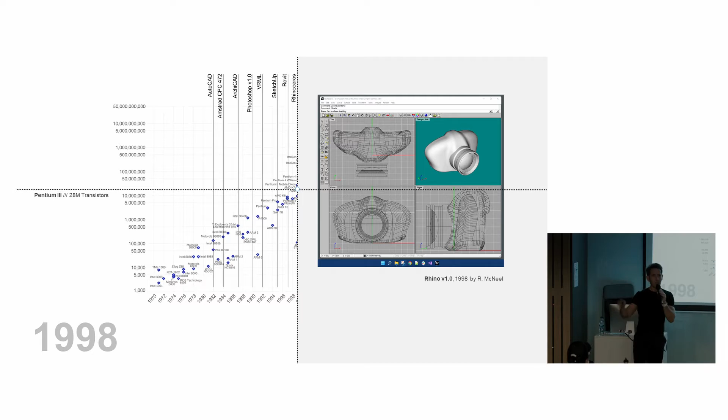We continued the progression. In 1990 we have the first version of Photoshop. Progressively, we're moving into Pentium 3, and Rhino version 1 was released. So we're working with NURBS, curves, smooth geometry, and every project was very blobby, very smooth. At the beginning, when a tool is released, we try to maximize the power of the tool. Then continuing to 2007, Grasshopper for Rhino was released by David Rutten and Robert McNeel.

And you can see here the power of the computers now is 250 million transistors. It's actually getting more powerful. So we're able to move complex geometries to code real time and display results in that fashion.

2010, as well, 3D printing starts. In the architectural way, or in pavilions like this one by ICD, start to take shape, taking advantage of the computational power and the technology that was released.

So getting closer to today, we're looking at 2020 when the pre-trained model GPT was released by OpenAI, and was kind of revolutionary, but was not probably getting the attention that it got recently with GPT 3.5 or GPT-4. So GPT-4 in 2023 by OpenAI was a game changer, and we started seeing a big transformation.

And of course, taking advantage of the new processors like Apple M3 with 50 billion transistors compared to just 4 years ago. So that's the exponential movement that we're having right now with technology and where we are.

So it's been not much time between when Autodesk was released, AutoCAD 1.0, and now ChatGPT. And for me, these 2 icons basically express the shift of paradigm we are in. We use computational tools, we call them tools, as something that aids human work. Now we're looking at computational power to be intelligent, to act as a new intelligence. So a shifting paradigm from tools that perform specific tasks to something that could learn and adapt over time.

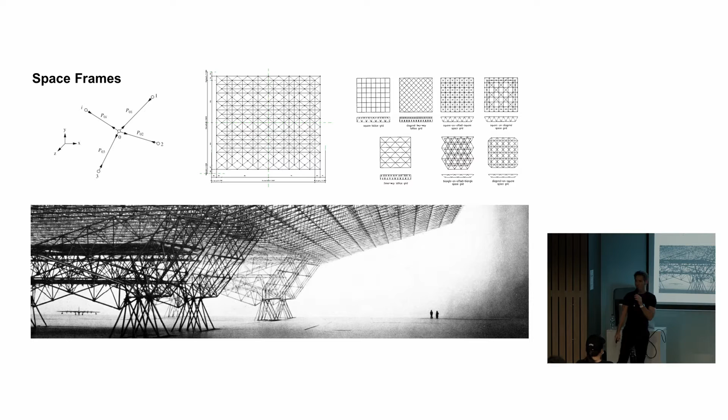You can place it exactly where you want. So you have deliberate control of the mass and the placement of your elements that define the space. So I focused over the last 7 years of my research on space frame structures. Space frame structures are defined by bars and nodes.

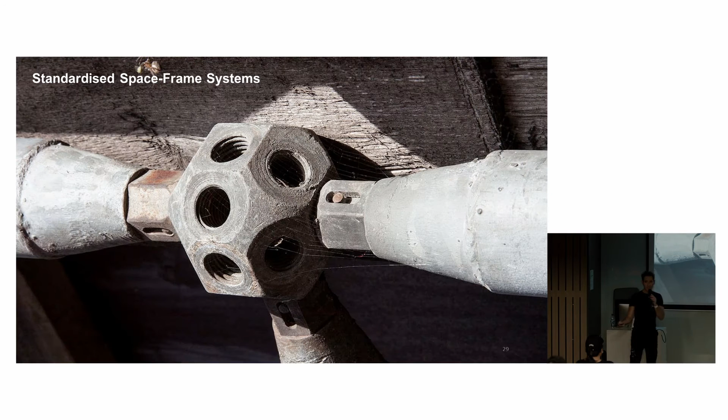Here you see standard nodes, and the standard nodes look like this, typically as a regular piece. So what I wanted to do is to challenge the way that those connections could be done, taking advantage of the current technologies by then, which is 3D printing and computational design.

Now neural networks have a different relevance, but the aesthetics and the topology of it was what inspired me to develop this system where we have 3D printed nodes, and also standard profiles. And the combination of both creates a free-form system capable of transferring the forces to the center of each of the nodes. This was developed as a system.

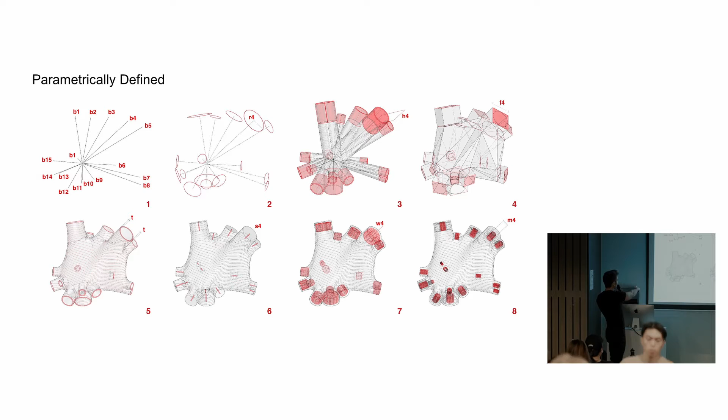So we have a parametric design model that can be reconfigured in real time depending on the geometry that we want to make. This is the process from vectors to cylinders to a convex hull in a faceted way, thickness, adding the connections, and all the parts are automated by the script.

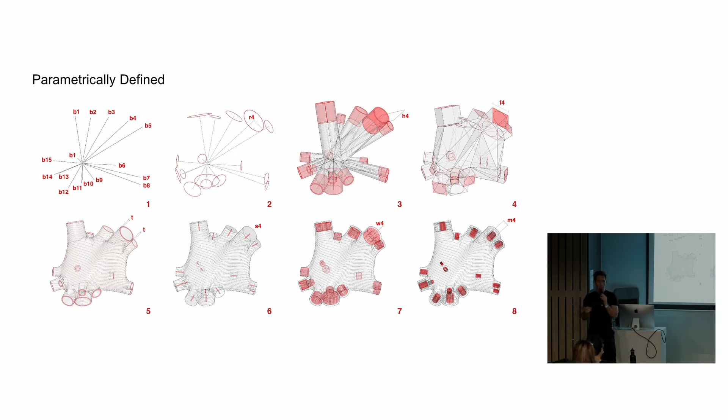So we design coding, right? Coding gets extremely relevant these days to address those complex challenges that we are facing. And then we have 3D printing. So the combination of coding with 3D printing allows us to produce these nodes.

More than 80% of the piece is actually air. So we are saving materials. We are placing the material where it's needed.

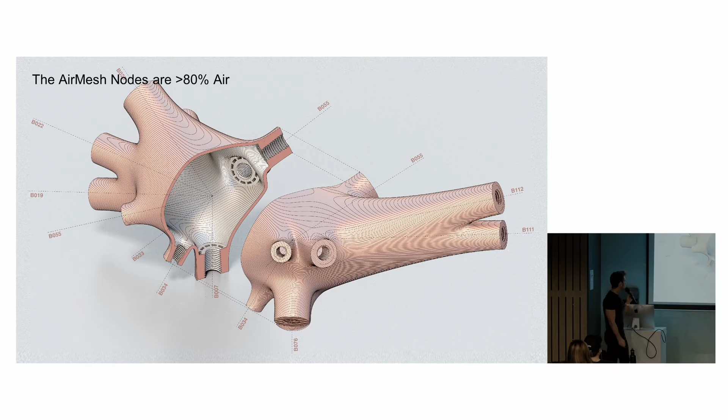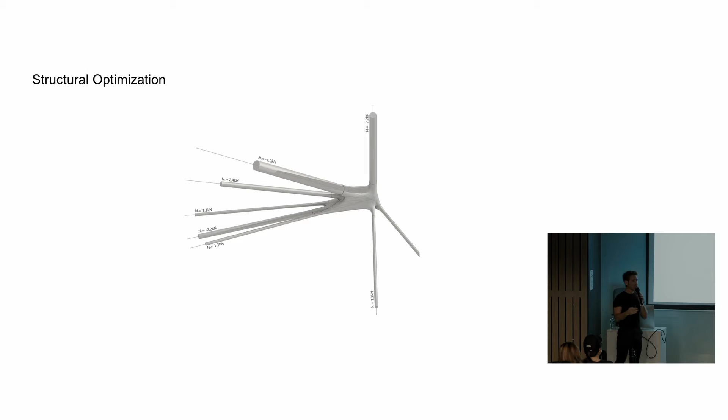So by doing that, we can print in stainless steel, using existing materials but in a completely different and more efficient way. So this is the generation process. We basically analyze the forces of the structure, then assign a diameter for each bar based on the force, tension, compression, and create the components for all of them. We have a dynamic model, a living structure that reacts to different efforts. This model is calculated in real-time, so we can make changes to every part of the design instantly.

So we tested the system at small scale, on a table. We did this table, and it's actually very thin. The bars are only 6 millimeters in diameter, and the nodes are 3D printed in metal.

We also tested at a larger scale, in this case using nodes in metal and nylon and aluminum bars. We also did light installations like this one in 2017 for Marina Bay, where the lights were concealed inside the bars and became a very inviting, magical material that people could touch and react to the presence of people.

We tested the system in different contexts and materials, even in the National Design Center, where that structure became a chandelier. Also with bamboo, we developed the system to absorb its imperfections and create regular structures like this one, which was at Duxton Hill for 3 months.

Then we moved to Gardens by the Bay for our idea. The idea was to build something more permanent, like for 3 years, a pavilion that could take the load of people and be code compliant—the first in the world with stainless steel that was code compliant.

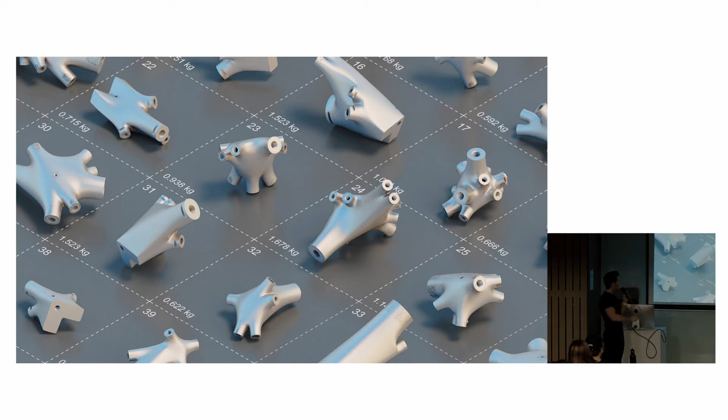So we developed all the connectors that you can see here. We control every single part of these connectors—we even print the threads for the bolts to go in. That's the depth we get when we use computational design to fabricate these components.

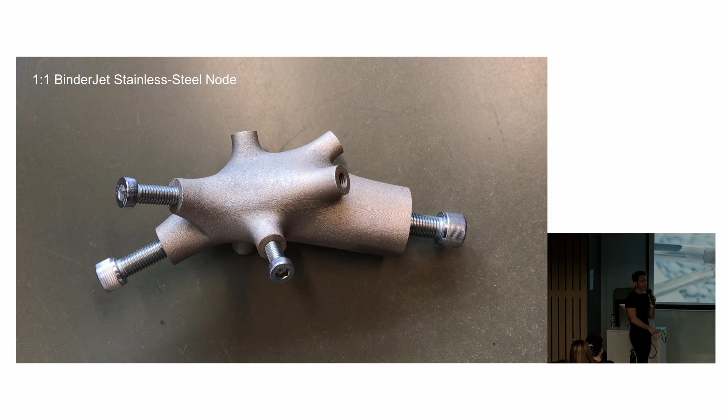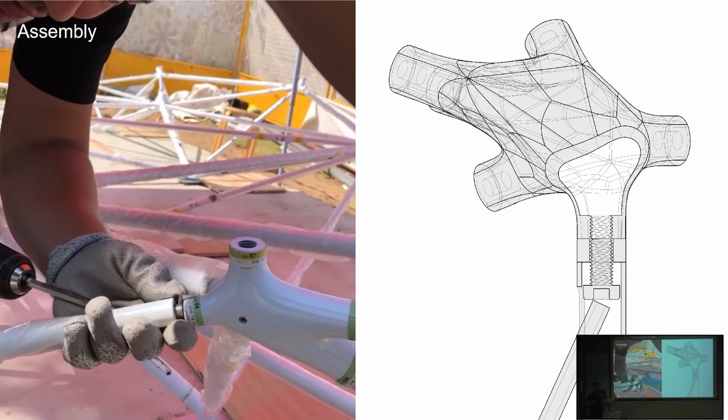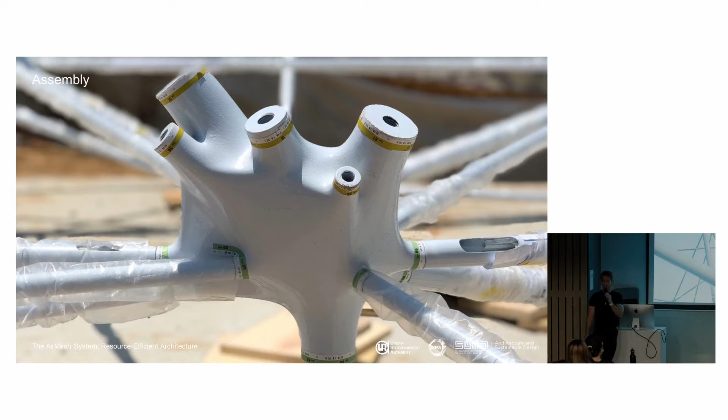Then we label them. We have a model with structured data, so we can label and connect them like IKEA furniture. We just go to the site, find the bar, find the node, and in 5 seconds we have a secured connection. We were able to build this structure in less than a day, with just the 5 of us researchers putting it together.

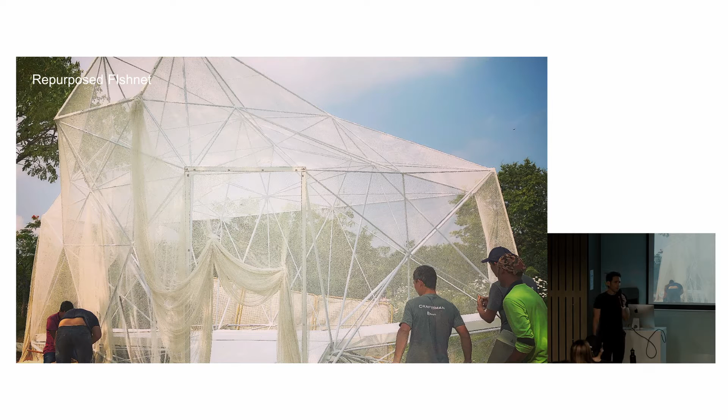And this is actually code compliant—a proper stainless steel structure that can take the load of people, furniture, living loads. We tested it by putting 3.5 tons of weight on it. With a 3D scanner, we could see the variation and movement of the structure, which was just a few millimeters. So again, talking about precision, right?

When we look at this space right now, the position of every single point, the structures, the loads that travel through the structure have all been deliberately calculated. So we feel really in control of each and every part of this pavilion, of this design, that we were fortunate enough to get here, Kelly, in the picture.

The President's Design Award, right during COVID times. We were able to be there at least—it was tough times, but we made it, and we got the appreciation from the community of designers.

But then, about 2 years ago, I would call it the impact. Something happened, and it was almost overnight for me. I had been working with AI in different projects—I was teaching a robotic arm to make a tall structure, trying to address loads with AI to create new aesthetics—but this was something new. I was like, what's this about? For me, it's like, okay, now I know human intelligence, but now we are dealing with some new kind of intelligence.

So the core of this presentation is divided into 3 parts. The first one is working with a new, fresh uncertainty. The second one is taking control. The last part is more about the expansive waves we are in.

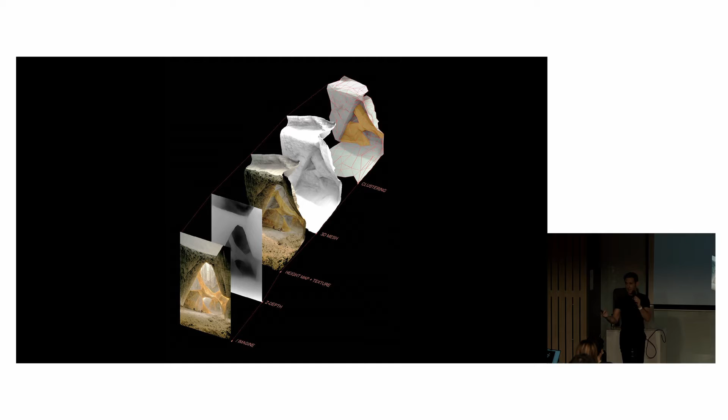This is basically created with this workflow: we have the image, we can create a Z map with AI. With the Z map, we can displace the image so we have a certain volume, and then we can do some segmentation, so we can cluster and assign different parts to the mesh. With that, we can actually turn an image into a real landscape in just a few seconds.

Talking now, it's as if it was really, really long ago, but it's only 1.5 years ago. So then I was also trying to fuel my interest in landscape integration, trying Midjourney, and the possibilities of can we weave architecture with a mountain, with something more belonging to nature. I was creating this series in September 2023.

Immediately, the reaction from my designer inside is to draw it. I put this slide because for me it's a statement: we're not fully outsourcing our life to AI. This is not the way, and I think it's not going to be the way, at least for the next few years. We still have a good 5 to 10 years in which we are going to be working hand in hand with AI.

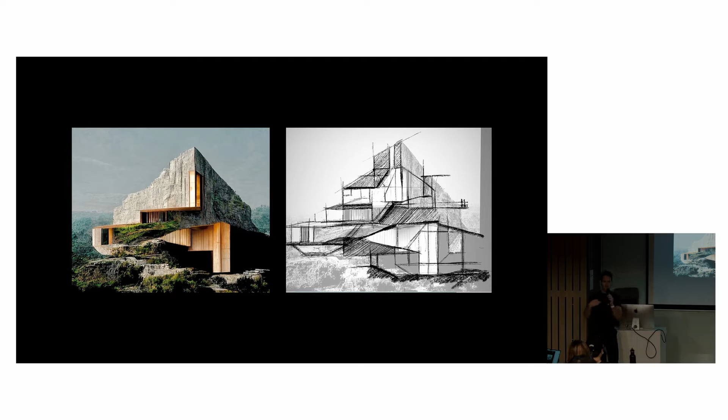So we need to establish that conversation where we are prompting, then we draw and sketch, we rationalize the geometry, we take it back to a 3D model, then we go back to AI. It's always like a conversation, and it's two-sided. We need to live with that.

The word consistency is always there in AI, because when you prompt, you get very different things. So the difficult thing is to get similar things throughout, so you can create a consistent design. Here the exploration was to try to create indoor spaces that were consistent through different locations of that mountain.

So you can create your own references, and the quality was very fine. The depth of field, the focus was fantastic. So I was testing, right? I mean, can we represent as well...

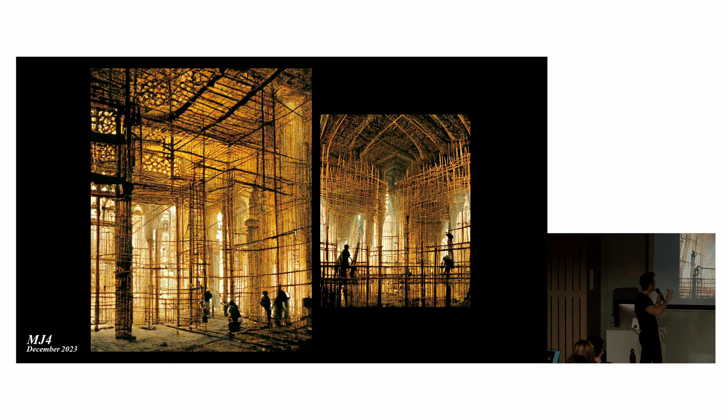...the construction of these bamboo structures, not just the bamboo itself, but the process by which these structures could have been made. So it's not representing the final object, but the in-between stage. This is an exploration of those spaces using bamboo and the construction of these structures.

Here, exploration of patterns, trying to apply them. I was working on a lattice design for Louis Vuitton, and trying to use Midjourney. I was trying to use Midjourney every single time I had a project or a question, so I could challenge the potential of the model.

So this is the pattern applied into a wall, and the idea was to blend it, not just adding, but maybe carving, to integrate the pattern into existing constructions.

Also taking the idea of the patterns to a space, explorations on that, trying to see if we can create images from image prompts, and then we can try to inform the space creation. And also at the smaller scale, looking at the fine detail of textures, weaving, and complex articulation of spaces.

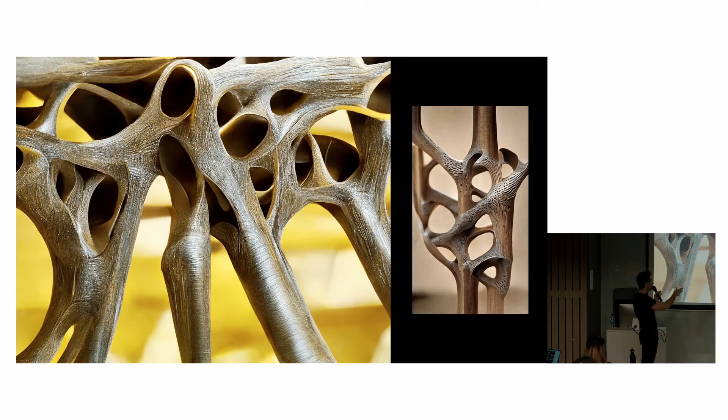Here, we're looking at the pavilion that I showed you a while ago. This is Midjourney developing it further. Maybe this is not fully buildable, but it's creating a certain direction that we could use to develop a future version of it, integrating steel and the aesthetics of bamboo. Midjourney works really well for that, blending very well different concepts and weaving them very smoothly. The prompt was working with metal, bamboo, and optimized structures, and you can see the hybrid materiality that you can get.

Testing intricate ornaments, like this part here with the Alhambra, seeing the grain, the resolution that we could get.

And then we move to the next level. This Midjourney V5 is coming closer to our days, so this is March 2023. Here we're looking at a series of images that are very realistic. We're looking at these kinds of cabins for a hotel project I was working on in Mexico, and the context is exactly the context we are actually working in. Describe the place, and the context was appearing, the slopes.

This is working with another concept that we have with the water tanks as a swimming pool, like in the landscape. So exploring this, a bit more daring ideas.

Working with style, here I was exploring concept designs for auditoriums inspired by the work of Enric Miralles. So the style is actually carried very well when it comes to prompting interior spaces.

I was also testing the design of furniture with 3D printing. Here, the focus was not just on the furniture itself, but on the user or also the designer. The idea was to represent the people behind it, or the people using it, which typically we don't have the chance to do. AI starts to blend the color of the dress and the material that is used.

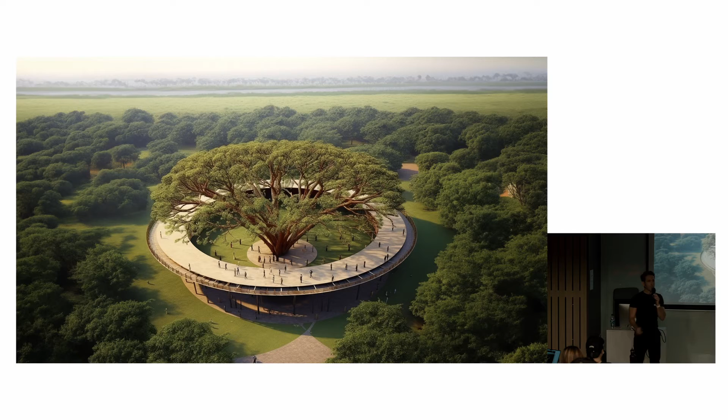Integrating landscape and the concept of parks that could be more three-dimensional and woven with the city. Or ideas like, how about we build around nature we don't touch? It's a concept you can try to consolidate into images thanks to AI.

This series was actually using some techniques of outpainting. Now with outpainting we can grow from an image outwards and create what happens around it. So from one image, maybe one cell, we create the context of what happens around the cell. I was creating these landscapes that had this stepped geometry, and they could be quite speculative as topographies.

And then also ideas like street sleeping. With Midjourney you've seen a lot of creations trying to take it to something that is not real, too far from what we want. But I try to find a sweet spot that could be provocative, like, how about we try to use a kind of bed in this kind of location? It provokes something. It's not that it's going to happen like this, but it tries to test ideas. Midjourney was working really well for that.

This is Midjourney 6, the latest version, the one that we have. Now we're looking at a very high grade of definition. We have control with the prompts, with the words. It can almost capture every single thing we say, and it will be there in the image. Now it's super sensitive, so we can almost make everything, but we need a lot of iterations to get there.

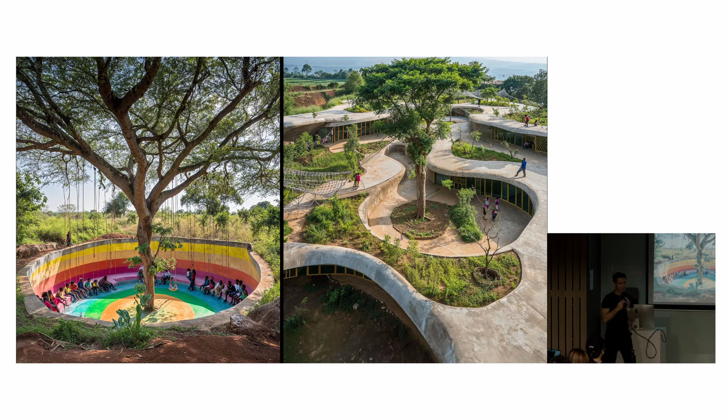And this is a concept for a school. That's the project I'm working on right now, trying to make partly happen, but some people say, well, you have these images, right? You don't have a project, you have just images. I think the mindset I have when I make this is I'm creating a project in my mind, maybe sightless. I have some conditions - if I'm asked to implement this idea into a place, I have the resources. I have the training in architecture, in design, so I know how to convert this into documents that can be used to be built. That's why with AI, at this point, you cannot just prompt and just make the building or make the space. You still need your own skills to be able to transfer this into our world.

Into the way that industry works. So images are very powerful because you can actually start rationalizing the geometry, drawing it nicely, create 3D models, and then just try to get there. So it feels like it's a different direction we can follow now. Typically, we work with diagrams with a very abstract approach at the beginning, and then we build up. This is more top-down - we create kind of the end we want to get there, and then we try to rationalize the geometry and build it from below to get there. It's a different approach.

So these also are videos created with AI - not just the sequence of images, but also the atmosphere, the way that the space could be used. And it really touched people, landed into people's heart. So I'm creating this series about how we can integrate nature into spaces that are educational, working with very little resources. In the end, it's just color, it's just paint, but it makes a huge difference when it comes to the design of those spaces.

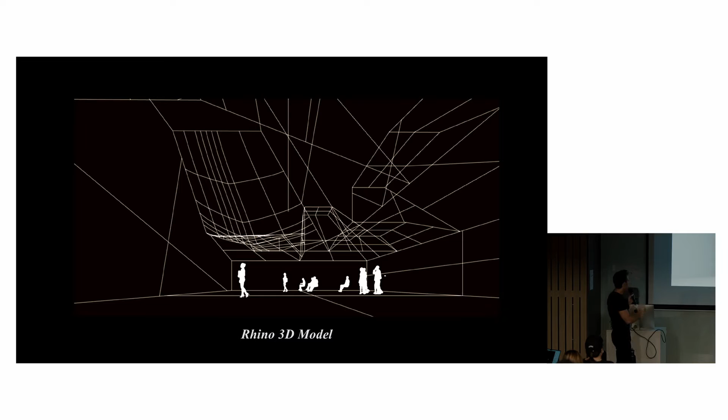slightly guiding the geometry. So you can still be in an in-between space. You can lose control a little bit if you need to, work around and explore ideas from a certain point you want to arrive at. So it allows you exploration, but also control if you need it. It's done, in this case, using a Z-depth map, which is very easy to obtain with any of the 3D models we have. In Rhino as a direct command, in SketchUp as well, you can get this information.

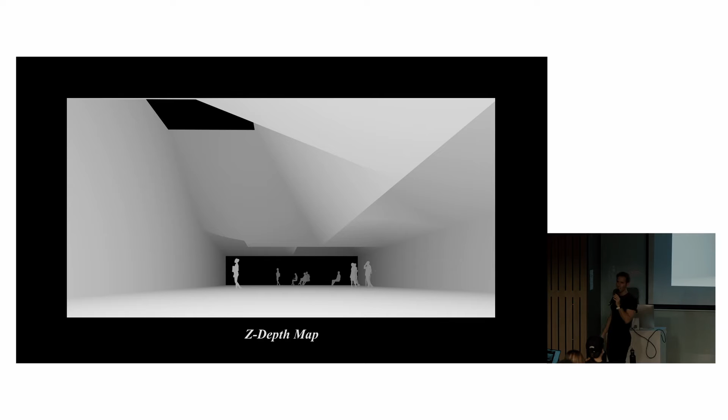And combined with this, we can get variations of the space in no time. It's a good way to study, to analyze that space from different perspectives, different light conditions, different materials, and it helps visualize different moments, and maybe develop a certain understanding of the potential of the space. And then we create our own workflows, right?

So to say, we like this image for some reason, and then we just feed it back into the system, and we can change maybe the prompt. Let's say now we use warm lights, or maybe now pouring rain, or we just go for wooden walls and red lights. And then if we want to continue with this one, we can actually change the seed and explore around that image. So it's a journey.

It's not like you have one image, one go, and then it's done. Actually, with one image, you start the journey and you start navigating with the different tools you have to control, with your words, your prompts, and with your images.

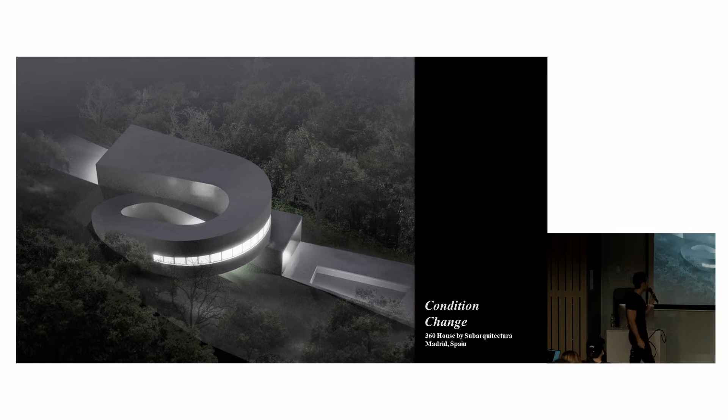So then I tried different things. One was, okay, let's revisit one of my designs that I built a few years ago in Spain. This is a house built in Madrid by my firm, Subarquitectura. So this is a built design, but also, this is how it looks.

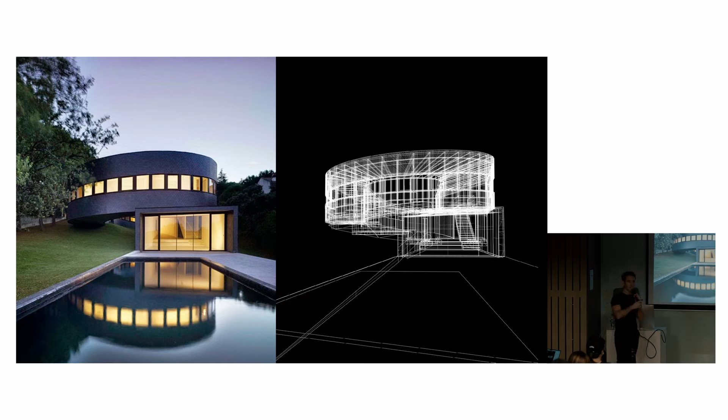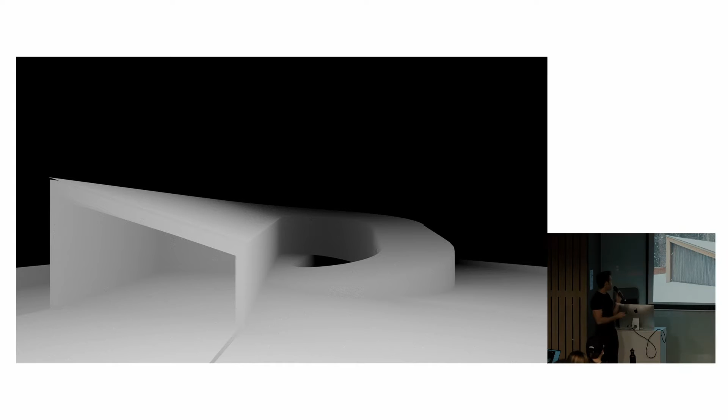It's the 360-degree house, and I made a 3D model of it. So I'm gonna use that 3D model to see if I can create images from that built piece. I place the point of view exactly as the photo you've seen before, and I prompt. It's like, well, let's make it covered in snow, or low budget, or with a green roof, and that happens in seconds.

So when you're thinking about materials, when you're thinking about options, that helps a lot because you can visualize them. And that allows you to explore other visions that you maybe don't have the ability to create, which helps widen your options.

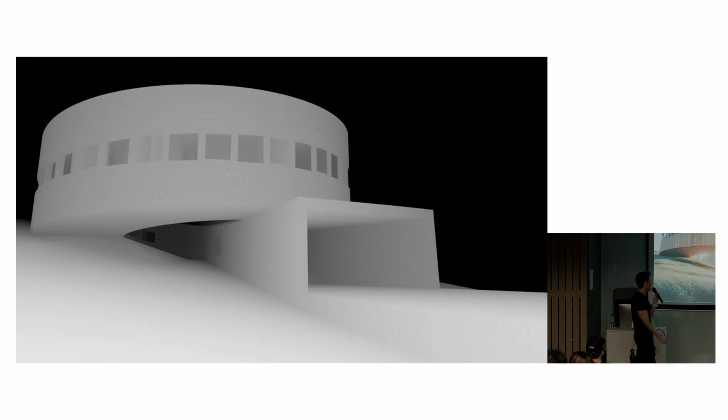And then by modifying parameters, you can fine-tune or create the same image from a different point of view while keeping consistency. You keep the same seed, so you can have similar results, like out of wood or covered in snow again. It helps test the idea—you have a 3D model viewed from different points, different moments, different light conditions to widen your palette. Also, if you lower the weight of ControlNet, you can start creating options still related to the original design.

So potential opportunities arise for the roof to continue, the courtyard, the windows. You start getting something from your design that could deviate into something you can capture for further iterations, or for the current one you're doing.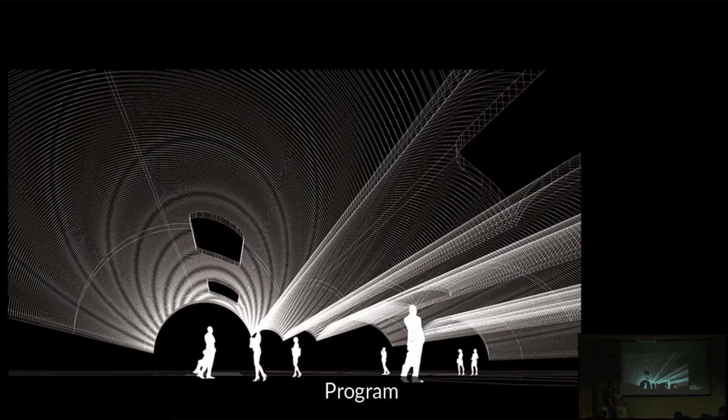This is an experiment I did last year with some of my students. Sometimes we work with geometry and we don't have a program assigned, we don't have a function—it's more like generic space, and the function can be found. So the idea was to create a model and then prompt.

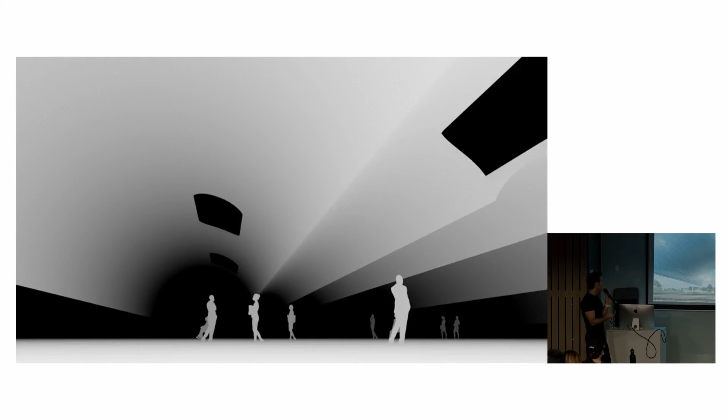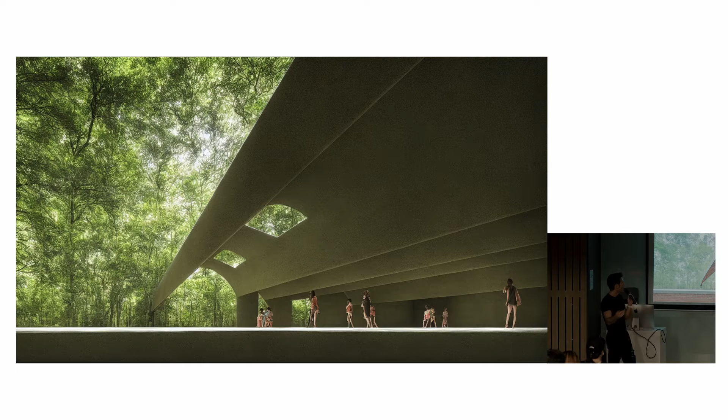So with the depth map again, and people to convey the scale of the space, the idea was to turn it into, let's say, a train station or airport—how the color changes the materiality—or maybe turn it into a park, a canopy for a park, or using bricks. All these things were done with just a simple 3D model and prompts.

Then the function maybe comes later. Sometimes we don't have all the answers at the beginning of a design brief, so maybe the function is something we can work out with prompts, while the geometry is given by us.

That helps when you're prompting—you say 'a tree with red fruits,' and it knows that the prompt applies to the tree. So it's basically trying to prompt where you want to prompt.

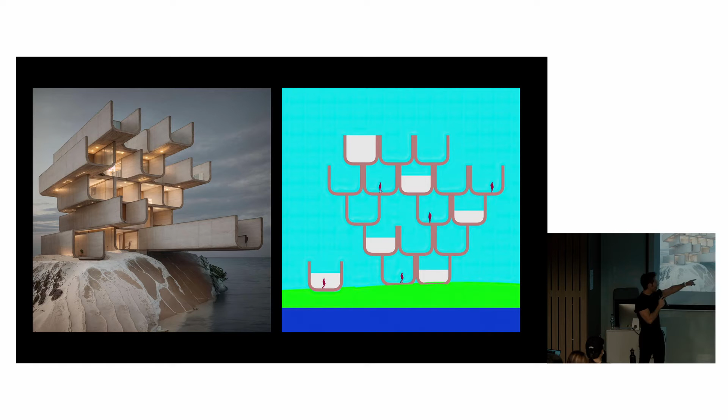You can actually see different points of view and iterations I did, integrating different materials or glass layers. But for me, the interesting thing is that it was done with the image on the right—to create such a complex image, I only had to start with what you see on the right.

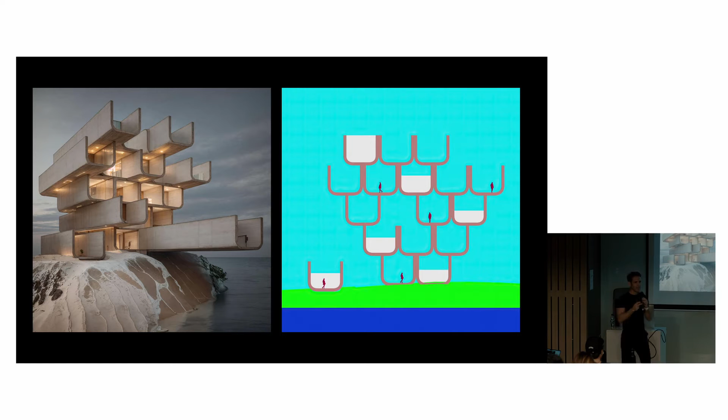So basically, I'm using segmentation to tell AI that this is the grass, this is the water, the concrete walls are in U shape, and the glass is in this white color, that particular RGB color is read as glass. So when I combine this with the prompt, I can create a spatial experience that goes exactly where I want.

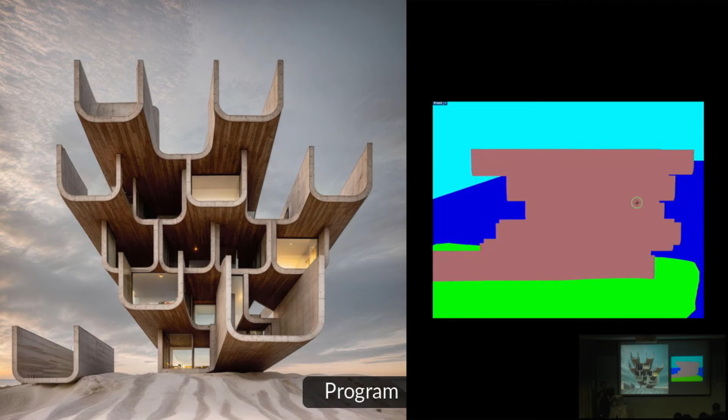So in the end, the way it was done was I did that in 2D, I extruded, and instead of using the normal rendering engine and colors that we use, I used the segmentation colors for my 3D model. So I set self-illumination to 100%, used exactly that color, and in real time I was able to see the AI model from my super simple 3D model.

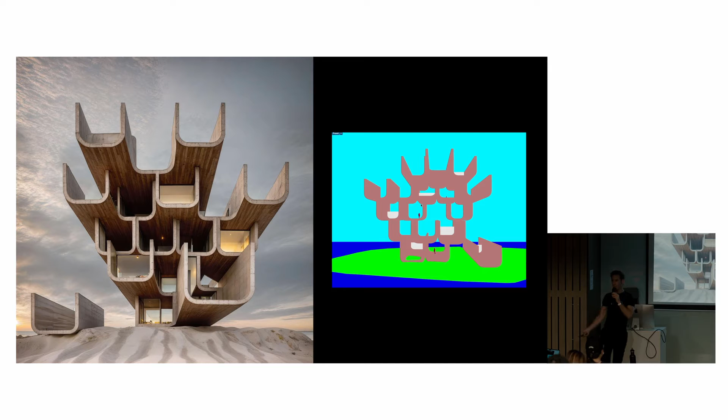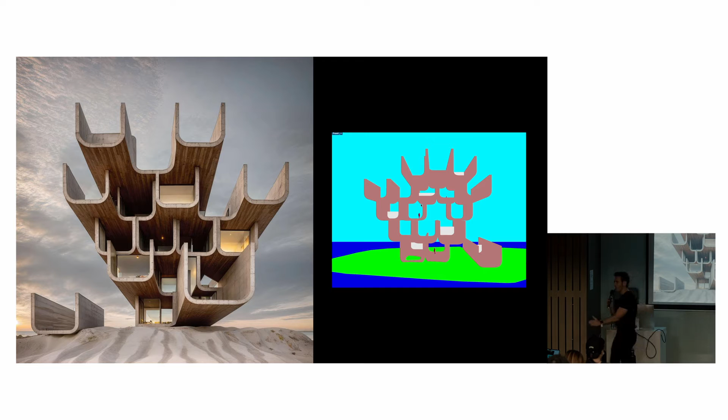So for me, developing a line in which I always ask the same question: how much do we need to produce, or when do we need to stop and let AI do its magic and then take it back? Because maybe we don't need to 3D model everything. We just need to model something that for us is really the essence of the project, and then we pass it to AI in a certain way, and then we get it back. So that's the mindset here.

So for me, it's a game changer, because we're not replacing anything, we're actually using our expertise.

So again, super simple 2D drawings or 3D models can create this: context integration, materiality, on the brutalistic side.

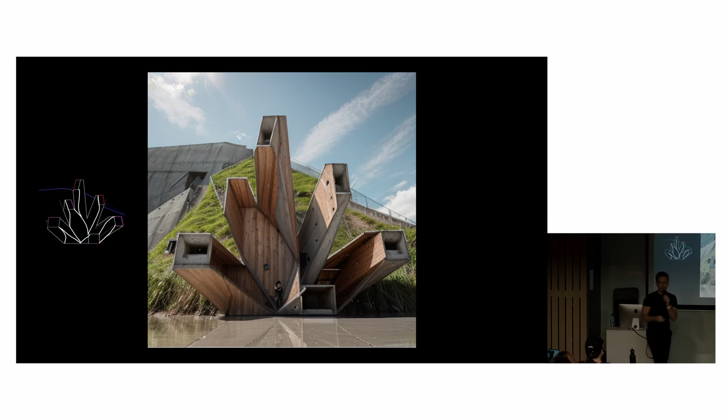So they created this realistic image: change of materiality and context, like here prompting in a Costa Rica context, or more in the Aztec-like area with clay materiality, going back to concrete, reflective.

So all our variations using prompts and varying the parameters, it could even be like a small model made of paper as well. So it does depend on what you say.

So I am developing a certain toolkit to do that, and to create an interface where we can actually play with that. It's coded in Processing, a language that was created at MIT. If you've tried it, I think you won't try something else. It's just so nice, it's like a joy working with Processing. It's very real time, and you can get results almost on the spot.

So what I did is create an interface that can transfer that image directly to ControlNet in real time, so instead of seeing this, we can see an actual piece of architecture. Then we can create all the options and variations we decide, because we can drag, change sizes, and try to find compositions that might be good for us in the facade. So we can try all these options.

And then you can take it to a certain contextual level. You can develop this using upscaling, meaning we're blowing up the size of the image and adding more detail, so AI adds more details. You can see many elements here in the floor, the ground, this door - all added with AI, based on the aesthetics and your prompt, even the person.

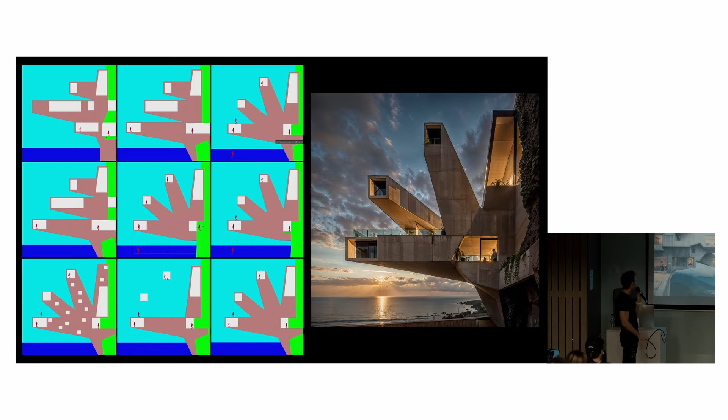Just producing more villas, I'm working on that, and you can see the level of realism you can get. Just from a few squares and shades, you're starting to create stories, starting to create spaces - these moments. You can actually, with the position of the rectangle, decide if it's going to be flush, or have a certain frame there. It's very sensitive. You can develop a certain toolkit to create details in architecture at very low resolution, just using color.

So this is the series, working with variations, exploring - that's the kind of sketches I'm doing right now. So I'm changing the way I draw. I didn't do these drawings maybe a few months ago, and now this is a new kind of sketch I'm using, getting used to. I've introduced that way of designing into my repertoire of options. It's not that I design only using this.

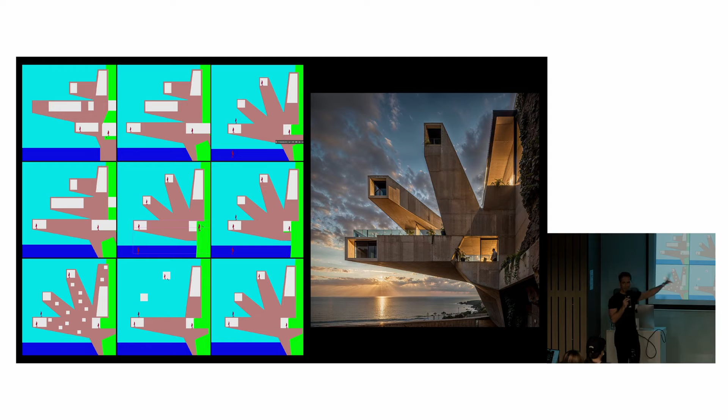There will always be criticism, like: okay, you're objectualizing architecture, you're looking at this as a piece. But we know when it's relevant to do these kinds of studies and when we need to shift to something else, like 3D models or sketching. So it's not that we are choosing one way, it's that we're adding one more, or many more, to our thinking.

So, hybrid Midjourney and Stable Diffusion workflows. For instance, I created this one in Midjourney 4 some years ago. Then we can use Stable Diffusion's ControlNet Canny, which analyzes the contours and lines, so we can change the lights very quickly - like, okay, night image, done. That's something we can do very quickly.

Or change the point of view. We can create a rough 3D model from the image and then create variations of the points of view. So from just one image, we can get so much information - we can actually turn it into a different point of view and explore different materiality for it.

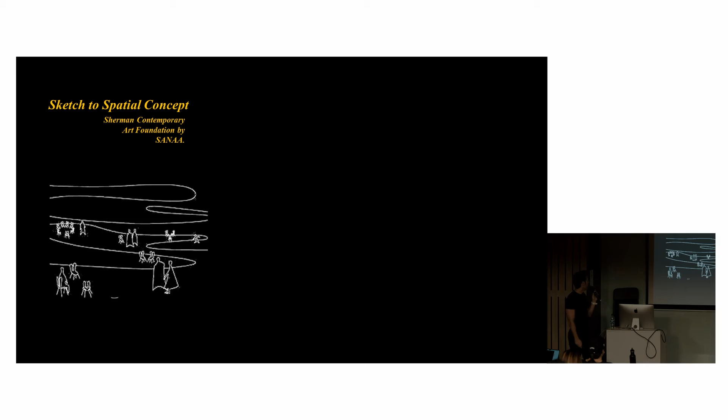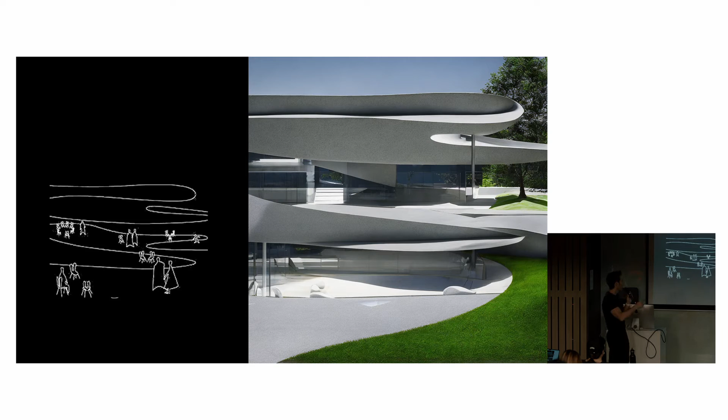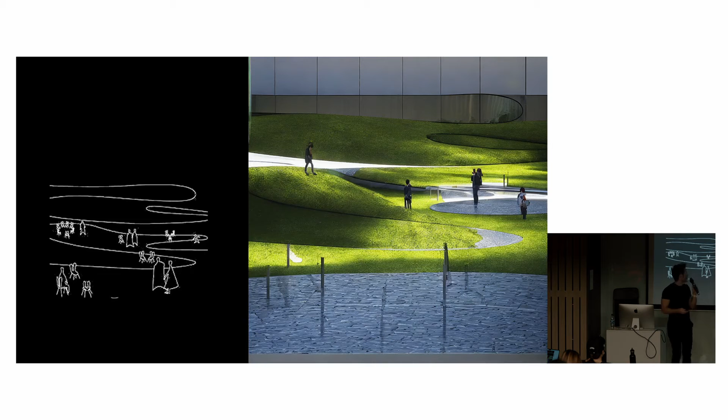I actually prompted using a relatively abstract approach, but you can see a translation, interpretation of your lines into some architecture, space, park, openness. So this line here now is taken as a roof, like the ceiling, but it could be something else. It could be just a layer of the ground, or could be a table. Depends on what you say, right?

That's also the interpretation of sketches, and what we're actually constantly doing when we design. We draw a line, and that line has a meaning for us when we're doing it, right? So it's the interpretation of geometry. We're learning hand sketching as well, as you've seen all around, but it's just to show you it's super possible to do that with a sketch, start creating a framework for a building, and further develop geometry and details through further iteration of the prompts.

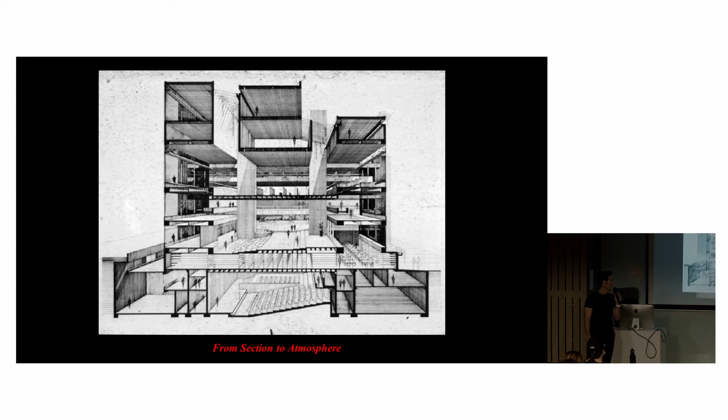And then your own drawings that you have made can be turned into more immersive documents. You can actually prompt with your lines, with your drawings, and get close to see the atmosphere of that drawing, or change the style fully into something more Japanese, for example.

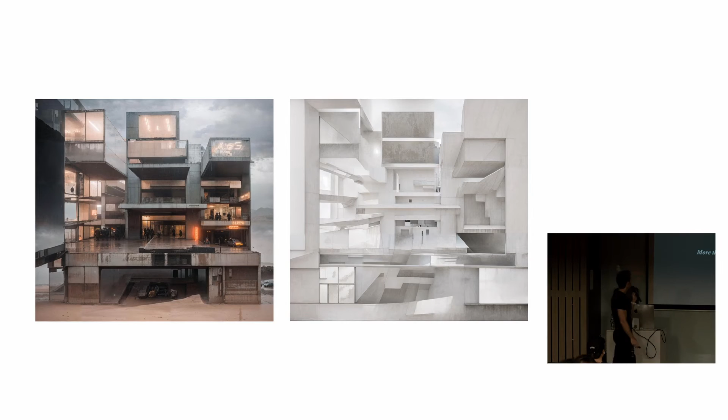I'm getting close to the last part. Here's the new SDXL models, powered with this new interface. Maybe there's some rejection to it, but also a lot of possibilities. It creates really interesting workflows, and you can change the materiality of buildings with a very high level of realism.

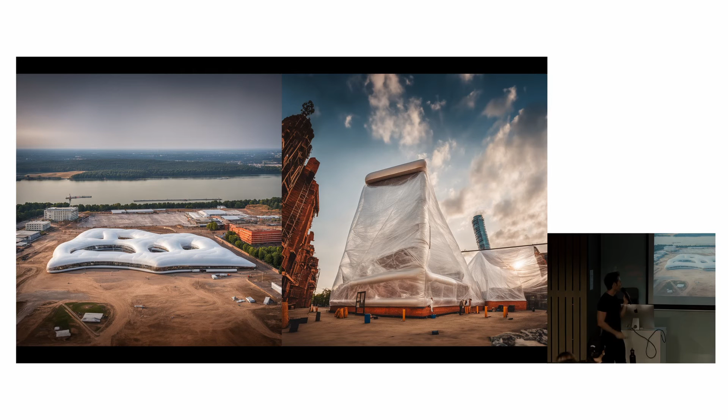Maybe you could recognize some of them: the Zaha Hadid building, the one in London, a cathedral made in bamboo, or the Sydney Opera House. Also the Rolex Center and the Tate in London. There's Rem Koolhaas on the right-hand side, and the Colosseum. But the interesting thing is what you prompt is not just the material getting replaced.

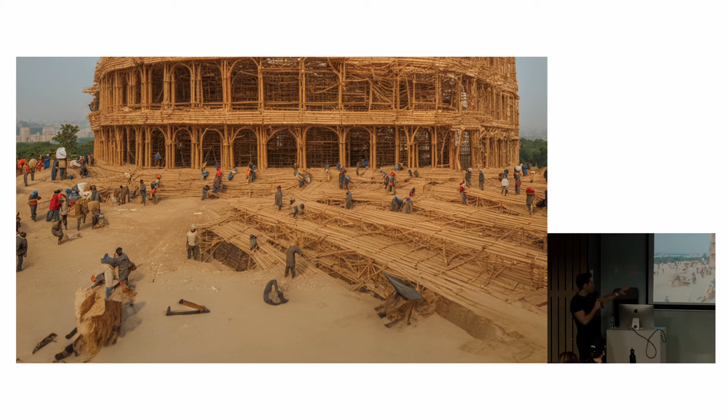It's the whole infrastructure. You can see people building the Colosseum out of bamboo, and what you see there is the bamboo preparation. It's not anymore just a change of texture, it's a change of the whole thing. We're keeping the lines, but there's a certain rationale of bamboo construction conveyed here. That's the level I'm talking about, and that's why this is far from what I understood a tool to be. It really falls into the intelligence side.

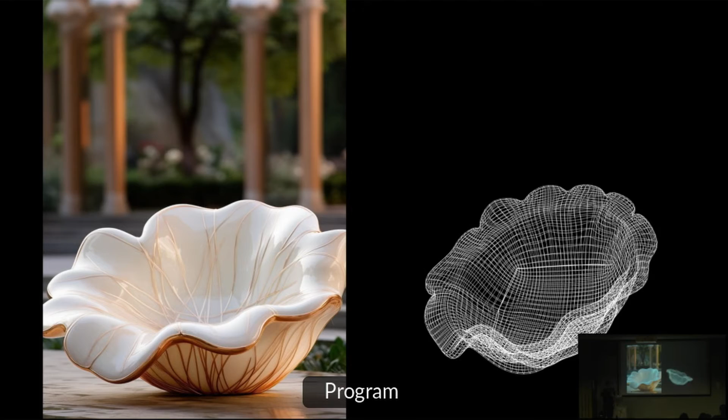These are Blossom chairs, and I focused on the making of the chairs and the potential variations of them - different materials for the chairs - and a simple prototype done in the lab with 3D printing. This also proves that from the image, you can create a 3D model directly now with the tools we have. So it's a good way to start prototyping - you have your image, you get the 3D model, you need to develop it a lot, but you have something to start from, with different options and variations.

Now I'm also focusing on training companies - in this case it was Logitech that contacted me, saying 'we want you to train our team to use AI.' I'm not a product designer, and I haven't designed mice - well, that one, the Renaissance mouse. That's why they contacted me, because they saw the mouse.

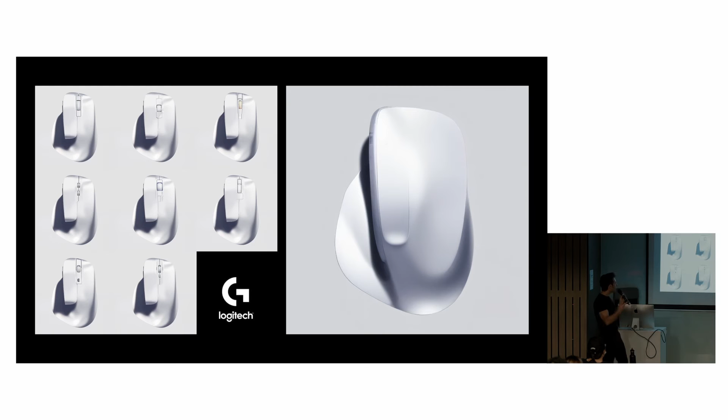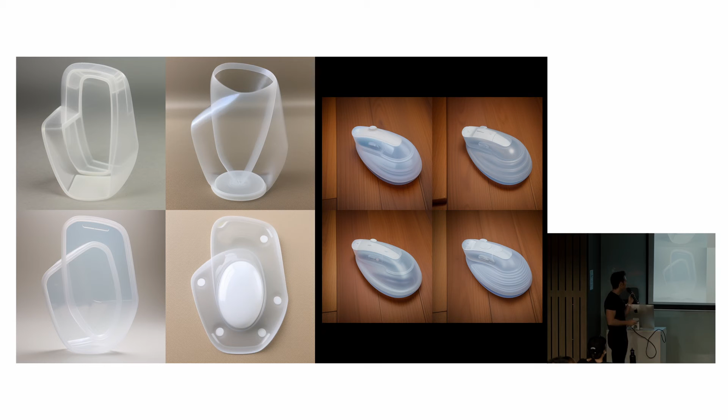So what I did with them is a workshop where they learn some of the things I showed here, the control, the conceptualization. So taking one design and developing it in a different way. From that one, turn it into a bracelet, for instance, exploring potential 3D models, changing details and aesthetics, like keyboards, color variations, or even more daring concepts with soft materiality and translucency. These were images done during the workshop by them, and they were really happy with the outcome. They say many of the projects are almost ready to start with production, so maybe in the coming months we'll see something like that. These were images created by them during the workshop, exploring ideas from the sketches, and some of them are quite product ready.

So the training has been quite important for me. The Taking Control course has had 3 editions, in May, July, and November, and there's a new one coming in June. This is through Parametric Architecture, an online platform, so it's flexible for me, and it's 2 days, intensive weekends. We work with about 50 to 90 students. And now I'm also doing this Villa series on Daily, which is very fun but also a drive for me to push research and constant creation. It's like a stream you're in.

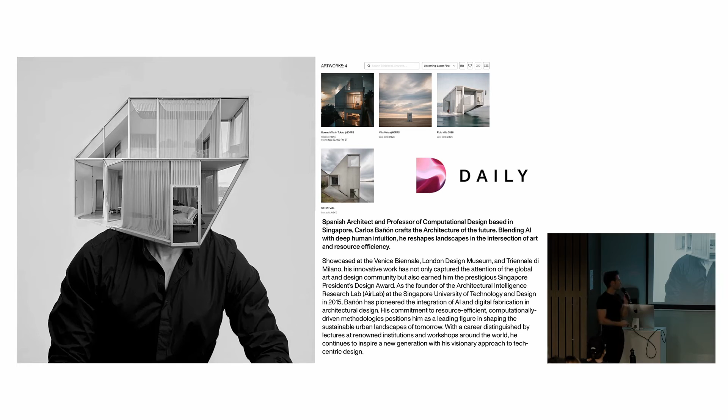I said that in an interview, but when I found the quote, I was happy about it. To conclude, I think I subscribe to that phrase: we're not just following the old rules anymore, we're making new ones, and I think we are actually changing the way we're going to design in the coming years.

We still need to have deep foundations on the fundamentals of design. We need our human touch, our wisdom, our selection, our curation, to control that. But it's definitely a game changer. Remember the first slide, 1982, at the beginning of computational years? Now we are at that 1982 point in AI. This is the beginning. We have just a few elements to play with, and the trend is super fast. We are just seeing the beginning of that. It's perhaps the most significant paradigm shift in human history.

For me, this is the manifesto I did some months ago: I think AI is a catalyst for collective growth. I think AI really can be that instrumental tool to truly collaborate. I think we're going to find a complete new domain. It's not like we're going to do the same thing again with AI, we're going to create a complete new space. So new roles, new jobs. It will be a completely different role as a designer.

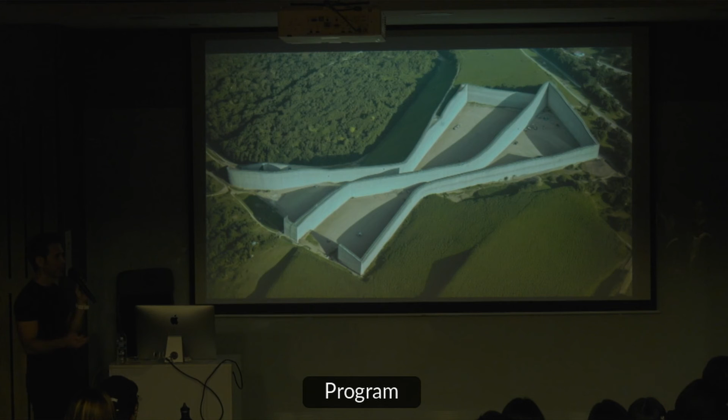So a line could be anything, but if we say it's a path, we can create a path. So these two lines could also be anything, but we're going to say it's a system, that creates maybe volume, or articulation, or segregation. So the same lines could be seen differently, depending on how we, in this case, use AI. Wrapping spaces, or maybe merging them, so the lines become just subtle changes of flooring.

Weaving the spaces, this complex.

And that's all. Well, thank you.

Thank you so much, Carlos. That was really mind-blowing for me.